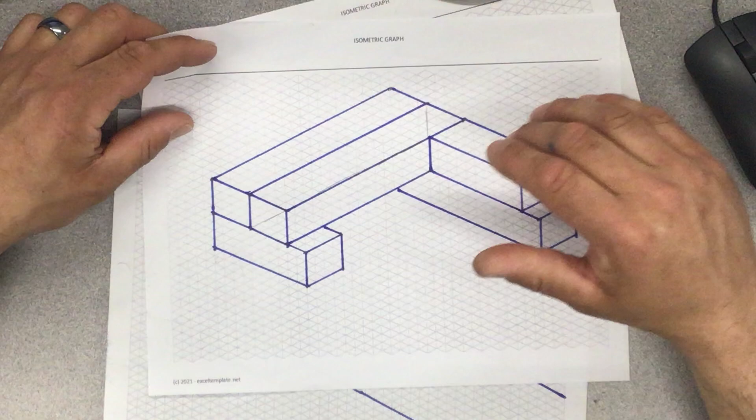Alright, so here we go. Alright, this is an isometric of the front view of the design that we're going to do today. What we're going to do is I'm going to show you how to do the back view of the design today. Alright, this is basically what it's going to look like if it was done in marker. But I'm going to set it up for you in pencil first, and then I'll do it in marker right after. Just give me 1 second, and we'll get rocking and rolling.

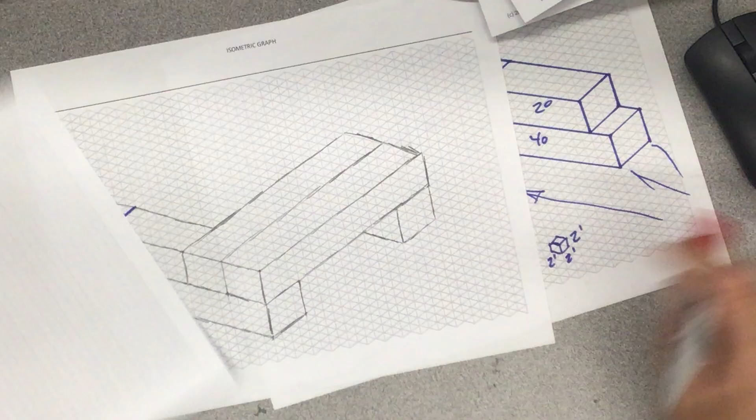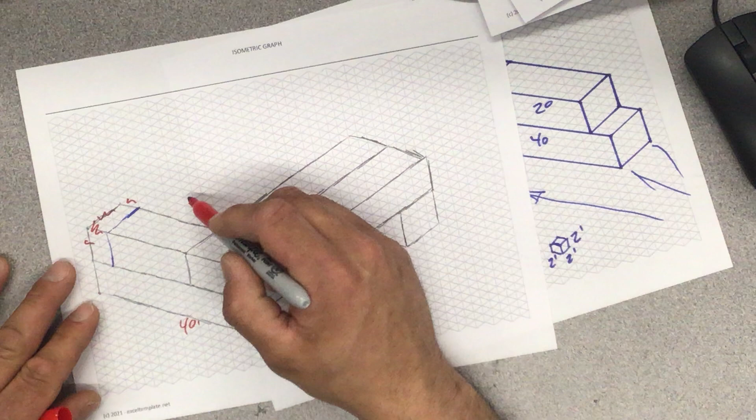Okay, now, the way you're going to start this off, what you're going to do is you're going to decide which corner you want to start with. I'm going to start with this lower corner here. Now, what we know about this drawing is that each box is 8 feet tall by 8 feet wide by 40 feet deep, if it's a full box. All right, if it is a short box, which this one is here, now I put a little extension on here. That was for an awning, so don't worry about that. These ones are 8 feet by 8 feet by 20 feet, okay?

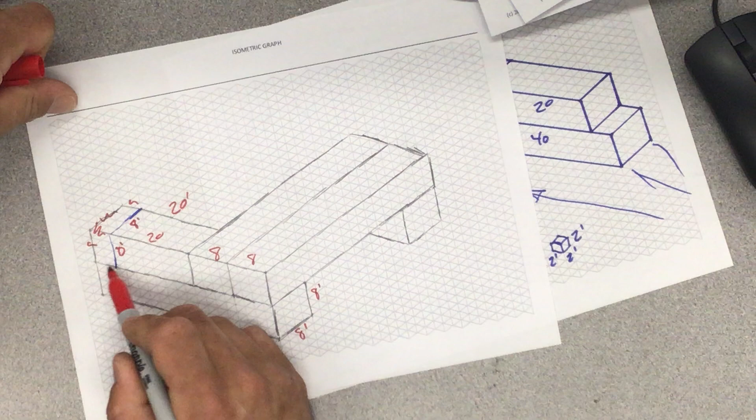When you stack boxes of different angles, you have to pay attention. If this is 8 feet, and this is 8 feet, and this is 20, 8 plus 8 is 16, plus 20 is 36. 36 is less than 40. So you're always going to have this little overhang when you try to stack them straight up and down.

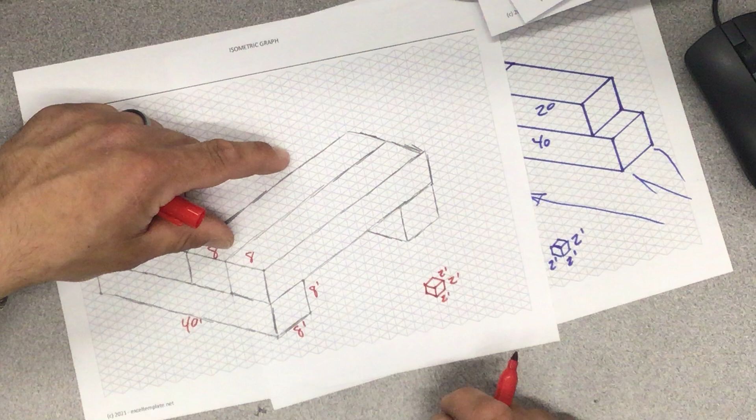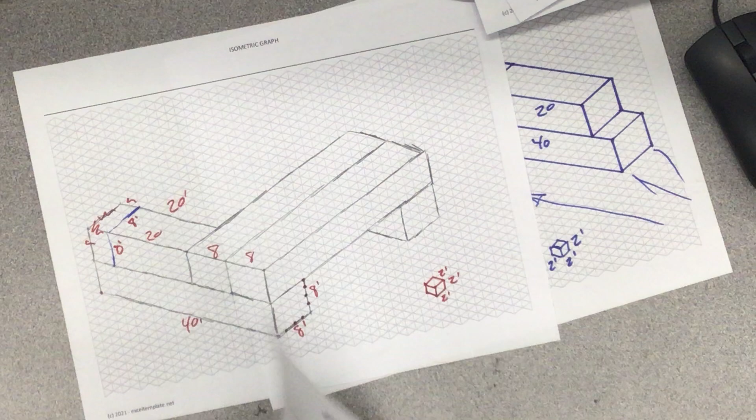What we're going to do to set this drawing up, we're going to need to know how big these squares are. So each one of these cubes is the equivalent of 2 feet by 2 feet by 2 feet in real life. So when we do a box that's 8 feet by 8 feet, you count up 1, 2, 3, 4 boxes high, 1, 2, 3, 4 boxes deep. And to get 40 feet, we're going to have to go 20 boxes over from corner to corner. So I'm going to start this up in pencil, and we can continue it in marker. All right?

So I'm just going to pick a low corner down here. Start. Okay. And my first box is going to be 40 feet wide by 8 by 8. So to go up 8, I got to go up 4 boxes. 2, 4, 6, 8. Go over. 2, 4, 6, 8. Go down 8. Now I'm going to come over 40 feet. So that's 20 boxes. 1, 2, 3, 4, 5, 6, 8, 9, 10, 11, 12, 13, 14, 15, 16, 17, 18, 19, and 20. Almost to the edge of the page. Go up 8 from here, or 8 feet, so 4 boxes. Right, I'm going to use my triangle to set this up.

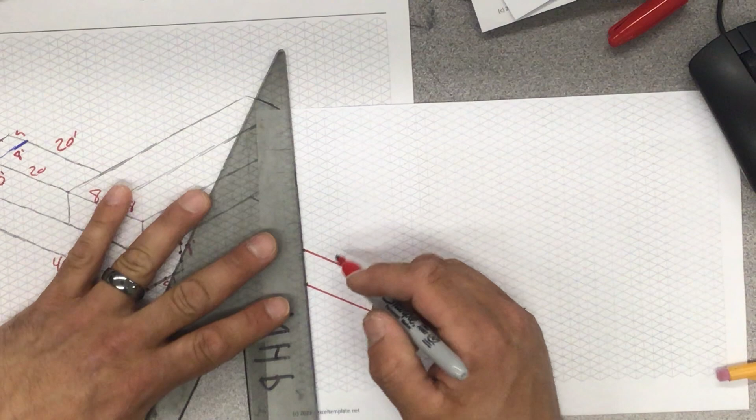And since I already did an example drawing, I'll be able to do this in marker. I would suggest you do it in pencil to start, just in case you mess up, you'll easily be able to fix your drawing. That's my first 40-foot container. Now, I didn't draw the top of the container because I know it's underneath this stuff. Now, from this corner, I have an 8 by 8 40-footer and an 8 by 8 40-footer right next to each other. So this will be pretty simple to set up.

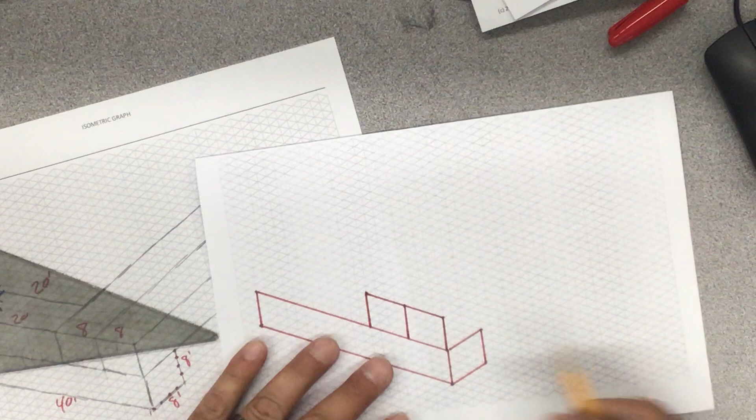Come over to here. Measure up. 1, 2, 3, 4. Come in. 1, 2, 3, 4. And then go 4 more. 1, 2, 3, 4. That's going to be the front 2 corners of your boxes. So I'm actually going to draw both lines in one shot, just to make life a little easier. And then we're going to come 40 feet across. So once again, you're going to count 20 boxes. 1, 2, 3, 4, 5, 6, 8, 9, 10, 11, 12, 13, 14, 15, 16, 17, 18, 19, 20.

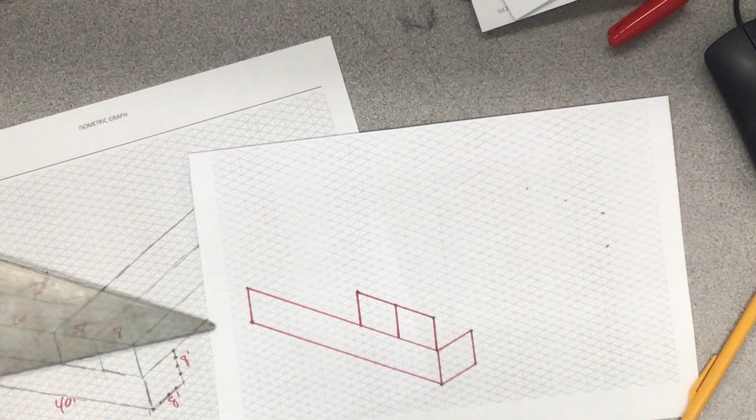From that 20, come down 4. 1, 2, 3, 4. Okay, from this one up here, come over 1, 2, 3, 4. 1, 2, 3, and 4. Now I should start to use my triangle again. I'm gonna double check my example, which is right. And bring these across.

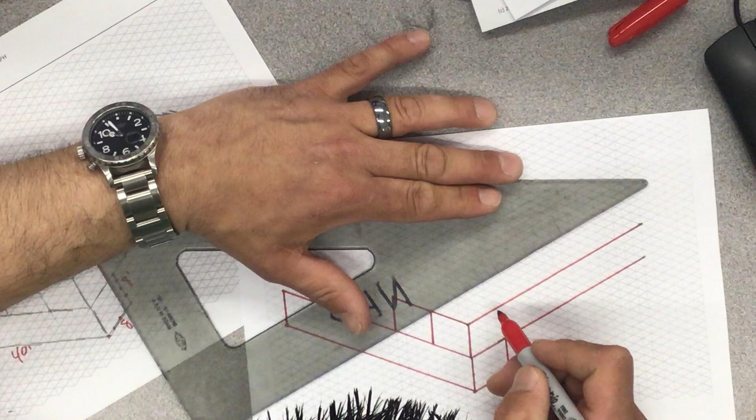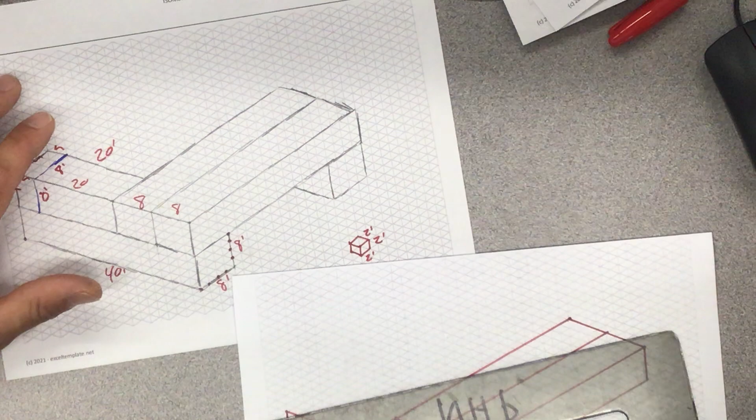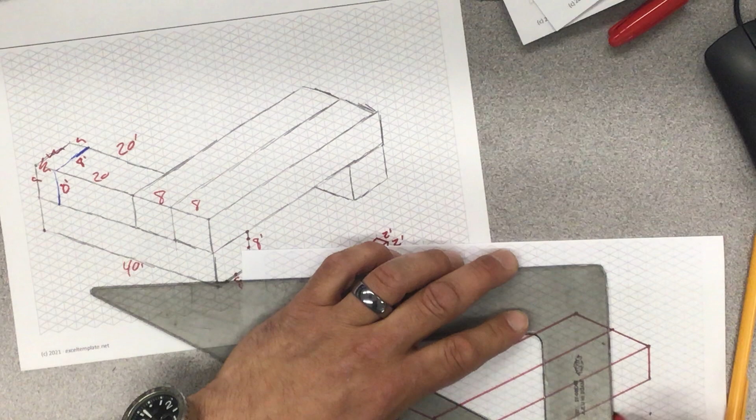Okay, underneath I have a 20-footer. All right, if you were to look at the front view, you'd see this is the 20-footer here. It sticks out and it's flush with the back. From the back, all you see is this little back edge and a little bit going to the side. So from here, I'm going to measure down. 1, 2, 3, 4. Come in. 1, 2, 3, 4. My triangle. There's my straight edge. 3 lines up.

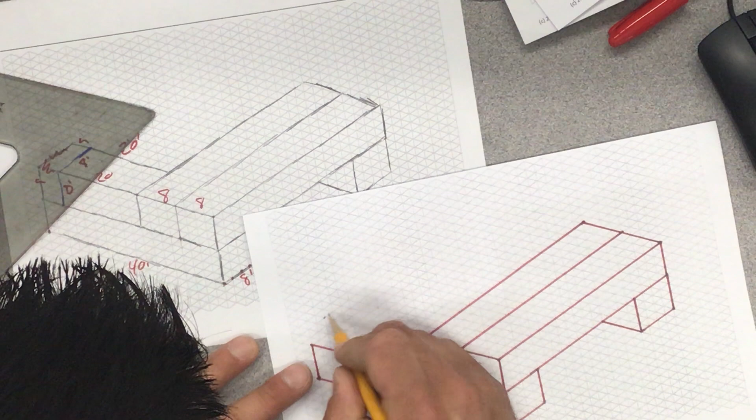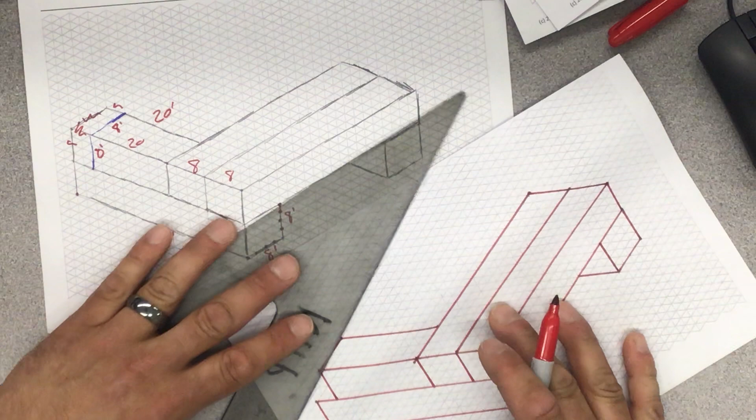Okay, and lastly, I just got to draw the box that goes up on top here. That's a 20-footer, not a 40-footer, so you got to pay attention. You got to go 1, 2, 3, 4, 6, 7, 8, 9, and 10. Come in 4, 1, 2, 3, and 4. All right, you should be able to set up your box pretty easy at this point. Okay, last little line I'm missing. This is the return line here. The top of that box.

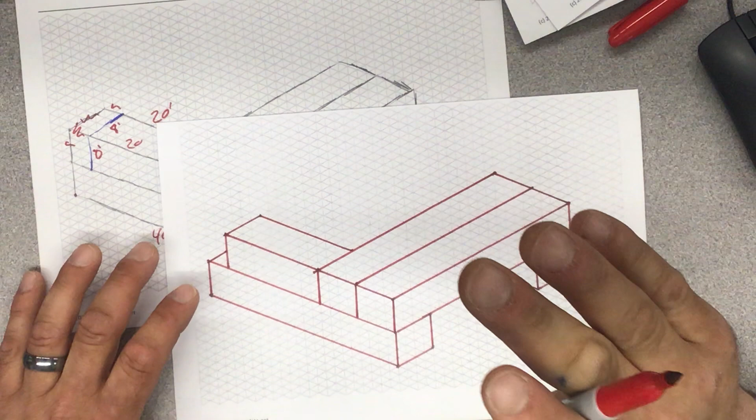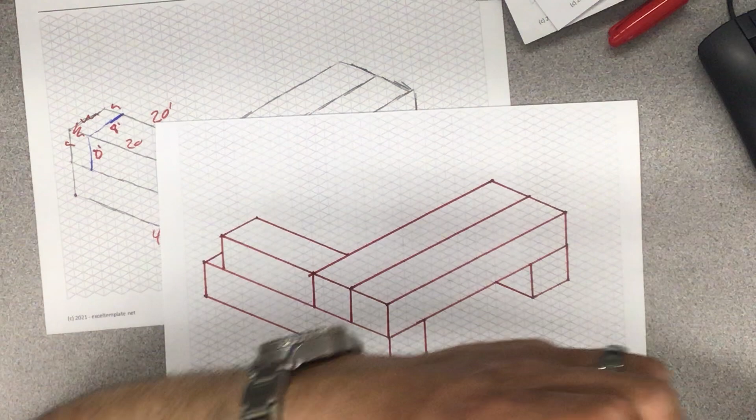This is what my isometric would look like from a rear view. Eventually I will add roofs and things like that to this, windows, doors, and everything else. But for today, after you've taken your 5 regular pictures and submitted them, after you have taken your 4 pictures of your favorite one, Bob, right? Mm-hmm. Then you draw your favorite one from the back corner and from the front corner. I'd suggest the 2 opposite corners from each other that tell you the most about the object, isometrically.

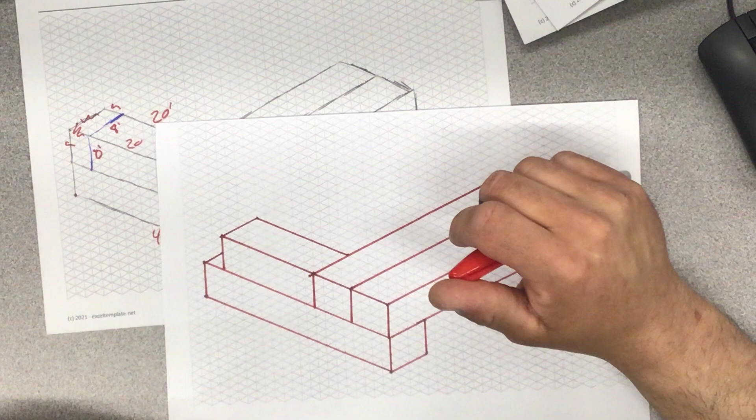You will need to print these sheets out. If you're in school, they're right here. You can take some. If you're at home, you should be printing these out. If you do not have a printer at home, I guess you can download or save the file that I put in Schoology, the isometric practice paper, and you can use the markup tool and the ruler to do that. I will probably do a lesson on that tomorrow for anybody that just has an iPad.

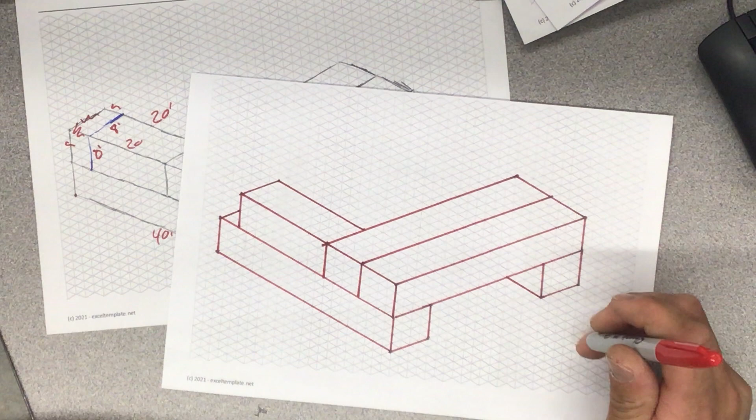But if you're in school, I want you doing it this way on paper. If you're at home, I want you doing it this way on paper. If you don't have a printer and you can't get your hands on printed paper, then I guess you can do it on the iPad, but it's not as nice on the iPad. Okay? I'd rather you be doing it like this. Okay? At the end, it should be in marker, so it's nice and bright.